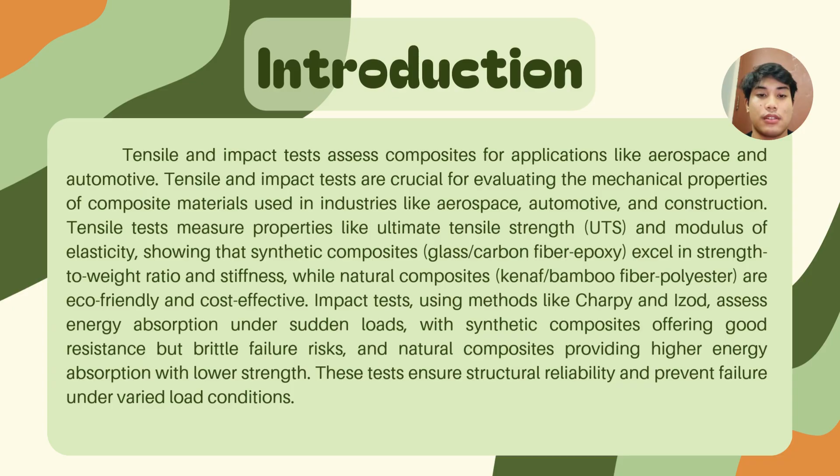For impact tests using methods like Charpy and Izod, which assess energy absorption under sudden loads, synthetic composites offer good resistance but carry a brittle failure risk. Natural composites provide higher energy absorption but with lower strength. These tests ensure structural reliability and help prevent failure under varied load conditions.

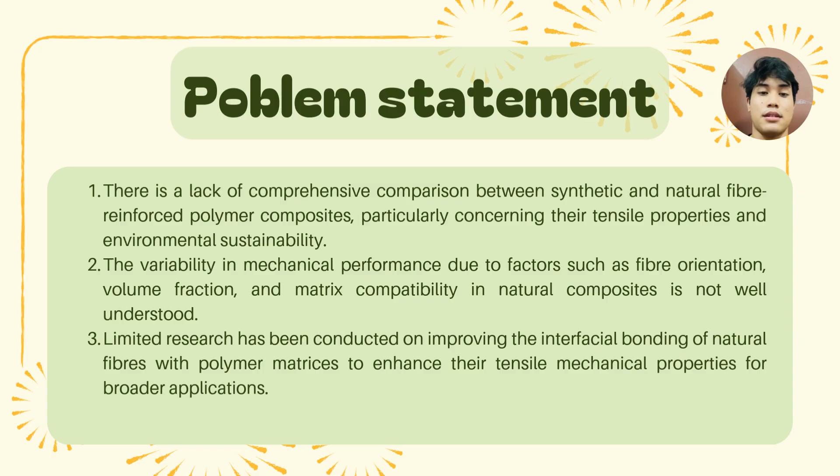For the problem statements: first, there is a lack of comprehensive comparison between synthetic and natural fiber reinforced polymer composites, particularly considering their tensile properties and environmental sustainability. Second, variability in mechanical performance due to factors such as fiber orientation, volume, and matrix compatibility in natural composites is not well understood. Lastly, limited research has been conducted on improving the interfacial bonding of natural fiber with polymer matrices to enhance their tensile mechanical properties for broader future applications.

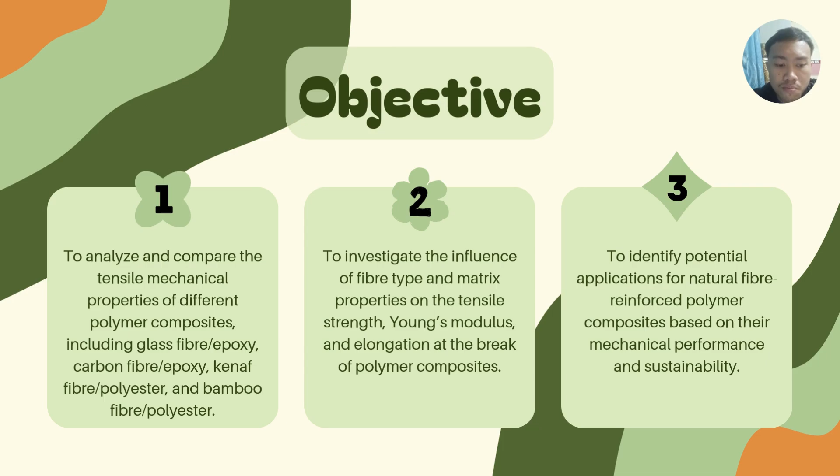For the objectives, we have three in this literature review. First, to analyze and compare the tensile mechanical properties of different polymer composites, including glass fiber epoxy, carbon fiber epoxy, kenaf fiber polyester, and bamboo fiber polyester. Second, to investigate the influence of fiber types and matrix properties on the tensile strength, Young's modulus, and elongation at break of polymer composites. Third, to identify potential applications for natural fiber reinforced polymer composites based on their mechanical performance and sustainability.

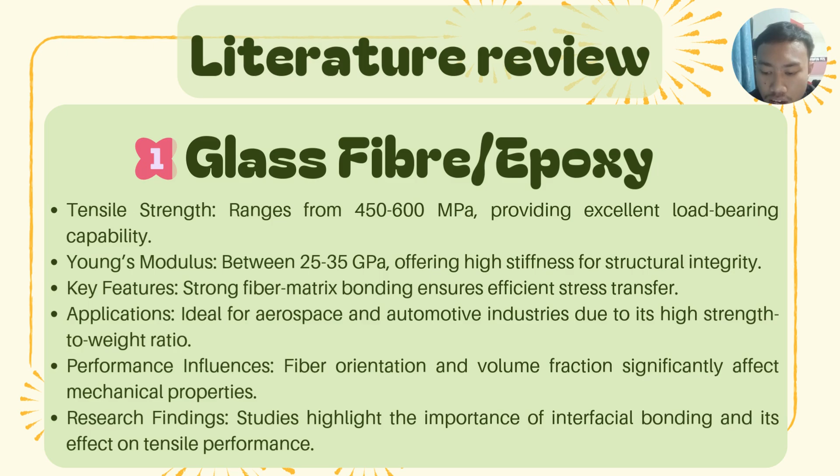Moving on to the literature review: glass fiber epoxy. Its tensile strength ranges from 450 to 600 megapascals, providing excellent load bearing capability, and the Young's modulus ranges between 25 to 35 gigapascals, offering high stiffness for structural integrity. Key features include strong fiber-matrix bonding that ensures efficient stress transfer. Applications are ideal for aerospace and automotive industries, and performance is significantly influenced by fiber orientation and volume fraction.

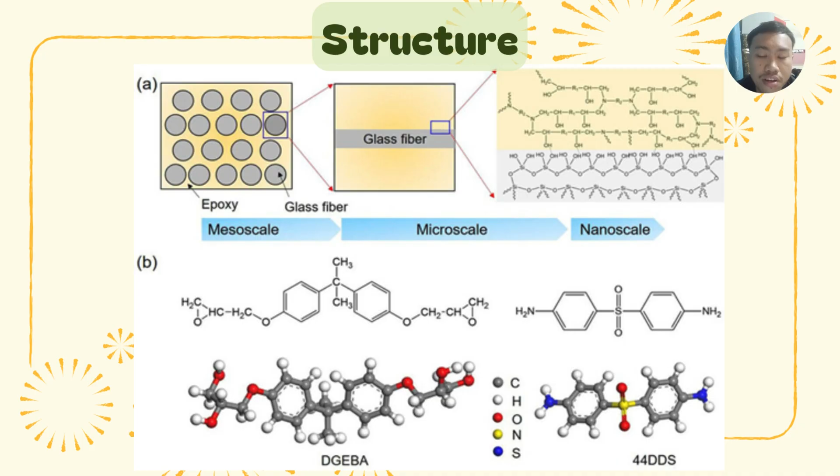Research findings highlight the importance of interfacial bonding and its effects on tensile performance. This is the structure of glass fiber epoxy: we can see epoxy and glass fiber combined together at part A, and at part B we have meso scale, micro scale, and nano scale.

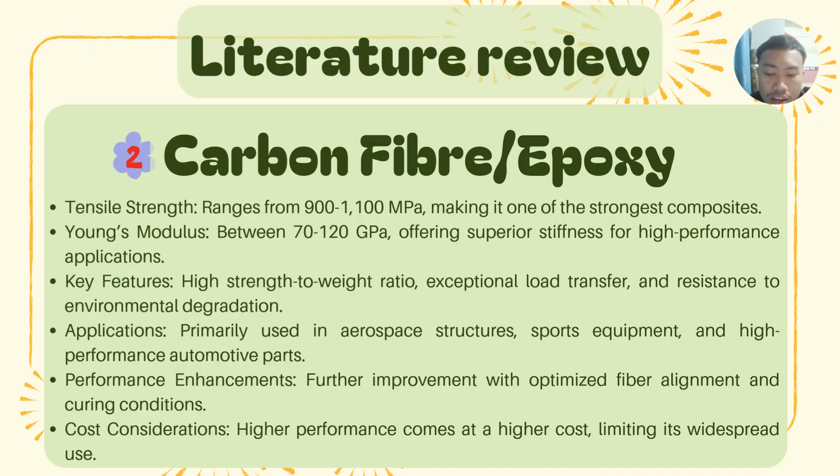It is also used in aerospace structures, sports equipment, and automotive parts. Performance can be further improved with optimized fiber alignment and curing conditions. As for cost consideration, higher performance comes at a higher cost, which limits its widespread use.

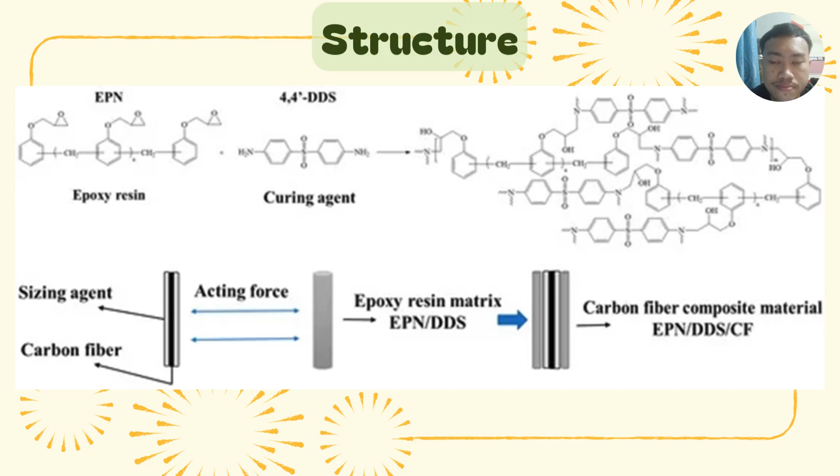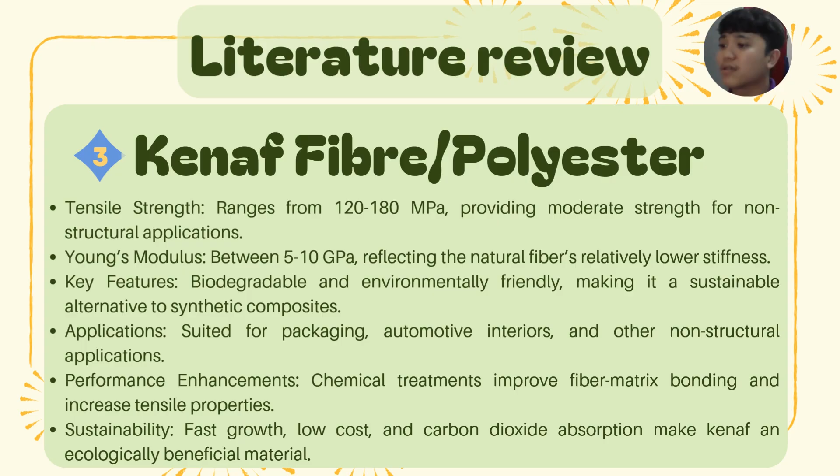As a reference literature review, bamboo fiber polyester: tensile strength ranges from 100 to 150 megapascal, suitable for lightweight applications. Young's modulus between 4 to 8 gigapascal, indicating moderate stiffness.

Key features: high environmental benefits, including fast growth and low pesticide requirements. Applications often used in construction, furniture, and low-cost building materials.

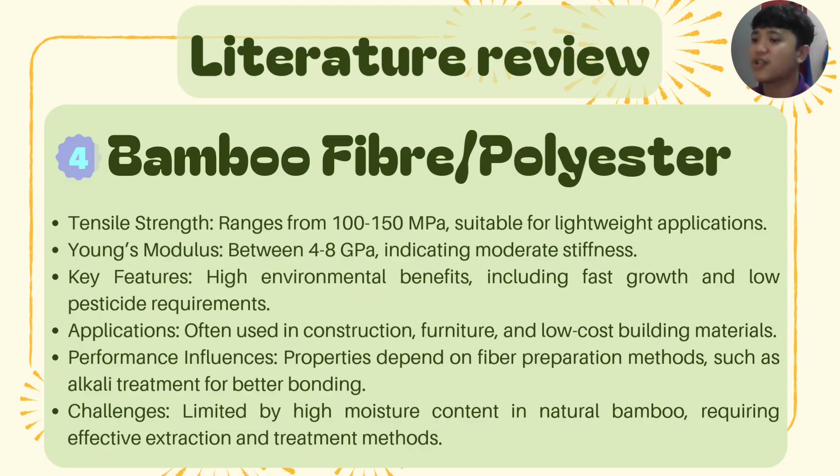Performance influences: properties depend on fiber preparation methods such as alkali treatment for better bonding. Challenges: limited by high moisture content in natural bamboo, requiring effective extraction and treatment methods.

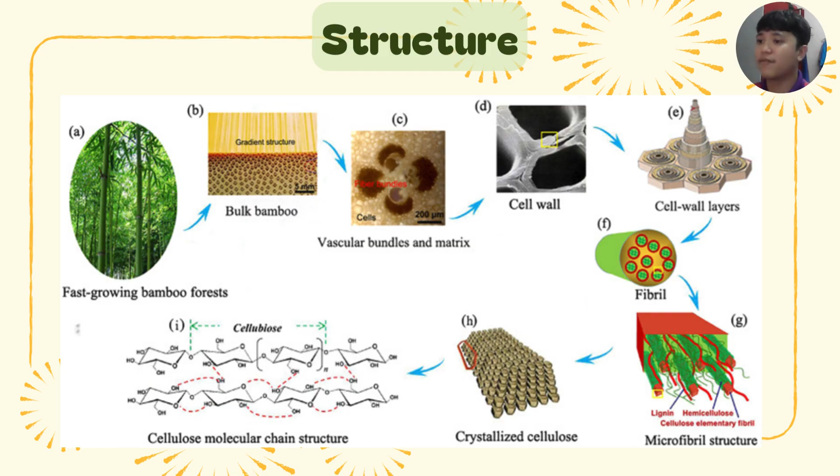As for the structure, it starts from fast-growing bamboo forest into bulk bamboo, then into vascular bundles and matrix, cell wall layers, fibril, microfibril structure, and crystallized cellulose molecular chain structure.

As for the literature review comparative analysis: glass fiber epoxy provides a balance of high tensile strength and stiffness, ideal for structural use in demanding environments. Carbon fiber epoxy offers superior tensile strength and stiffness but is more expensive, suitable for high performance applications only.

Bamboo fiber polyester offers lower tensile strength but is more cost effective and biodegradable, making it ideal for eco-friendly applications. Performance variability: mechanical properties are influenced by fiber orientation, matrix properties, and treatment methods.

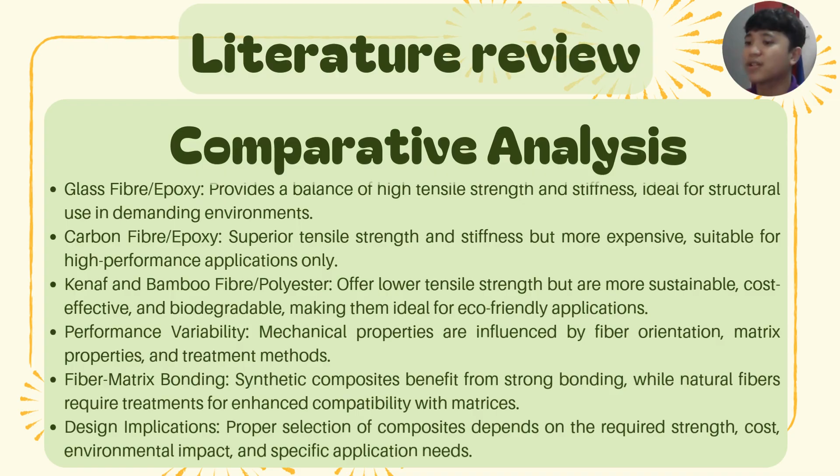Fiber matrix bonding: synthetic composites benefit from strong bonding, while natural fibers require treatments for enhanced compatibility with matrices. Design implications: proper selection of composites depends on the required strength, cost, environmental impact, and specific application needs.

Next, we move to the methodology. In methodology, we focus on fabrication and testing of the composite material.

For preparation of tensile specimens, UPE (unsaturated polyester) and epoxy resin were employed as materials. For the natural fibers, including kenaf and bamboo, surface treatments were adopted to enhance fiber matrix adhesion.

The most widely adopted treatment was alkali treatment, to remove non-cellulosic materials such as lignin and wax. This was not applied to synthetic fibers, because synthetic fibers such as glass and carbon have natural good adhesion with the polymer matrix.

For the fabrication technique, filler of 48 micrometer particle size was used, providing higher elastic modulus, wear resistance and thermal stability. For preparation, filler was dried at 65 Celsius for 1 hour, and epoxy was preheated at 65 Celsius to reduce viscosity.

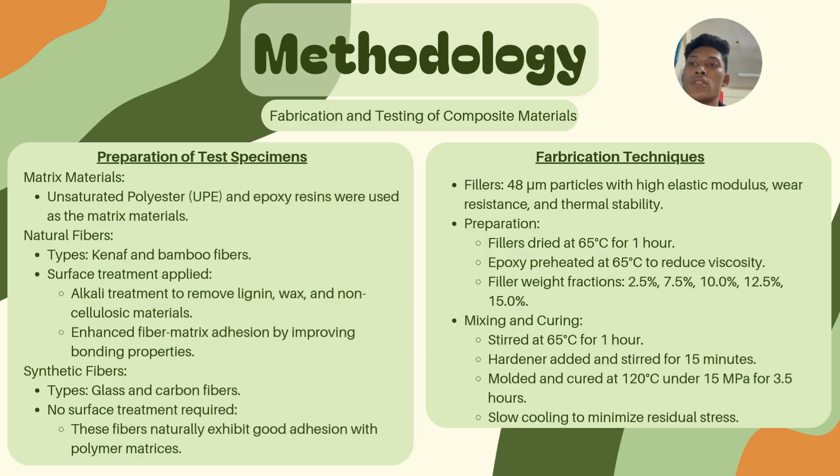Next, mixing and curing: stir at 65 Celsius for 1 hour, then add hardener and stir for 15 minutes. Mold and cure at 120 Celsius under 15 megapascal for 3.5 hours, followed by slow cooling to minimize residual stress.

Next, for the tensile test: specimens were cut into rectangular blanks using a diamond blade saw, and edges were finished with emery paper to avoid surface flaws.

The tensile test applies a uniaxial load to the specimen and measures the response of the material as it is stretched until failure. The purpose of this test is to determine the monotonic mechanical properties of the composite material.

Among the monotonic mechanical properties obtained from the tensile test are yield strength, ultimate tensile stress, and Young's modulus. Ultimate tensile stress is measured to determine the maximum stress the material can withstand when stretched or pulled before necking occurs, which is localized reduction in the cross-sectional area.

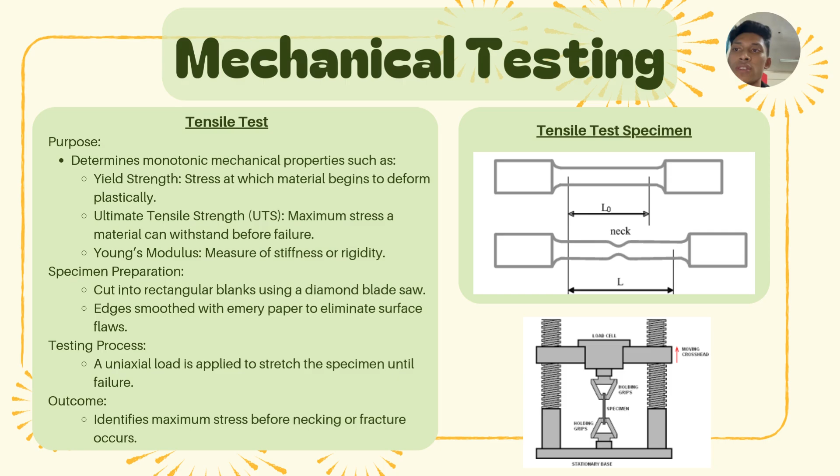For the impact test, this is a type of dynamic test that applies a sudden load to a specimen and measures the amount of energy absorbed by the material before it breaks. The most common types of impact tests are Charpy and Izod, which use a pendulum hammer to strike the specimen at a specific location and angle.

The impact test is useful for evaluating the toughness, ductility, and brittleness of a material, especially at lower temperatures with high strain rates. The purpose of the impact test is to evaluate material toughness, which refers to the amount of energy a material can absorb before fracturing. Impact strength is measured by recording the energy absorbed by the specimen during impact, typically expressed in joules. The results provide insight into the material's fracture behavior, including resistance to brittle failure and its ability to deform under stress.

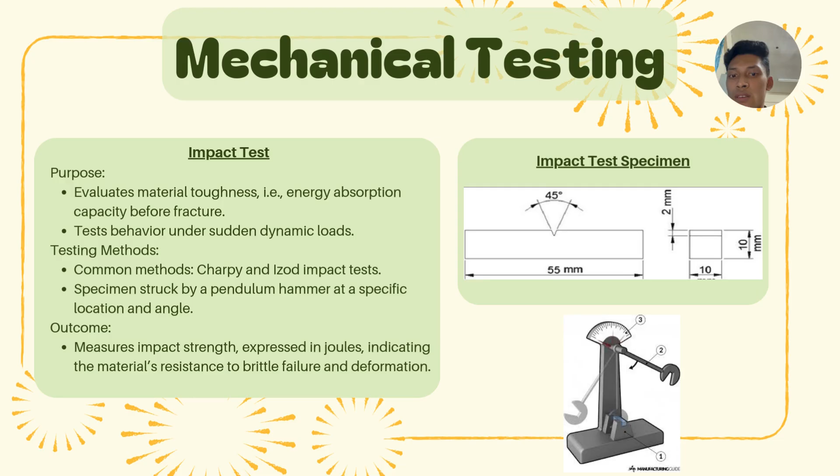Now moving to the comparison between tensile test and impact test: what is measured? For tensile test, material strength under a steady load. For impact test, material ability to absorb energy during a sudden force. For load type, tensile test uses gradual and steady loading, while impact test involves sudden, high-speed loading.

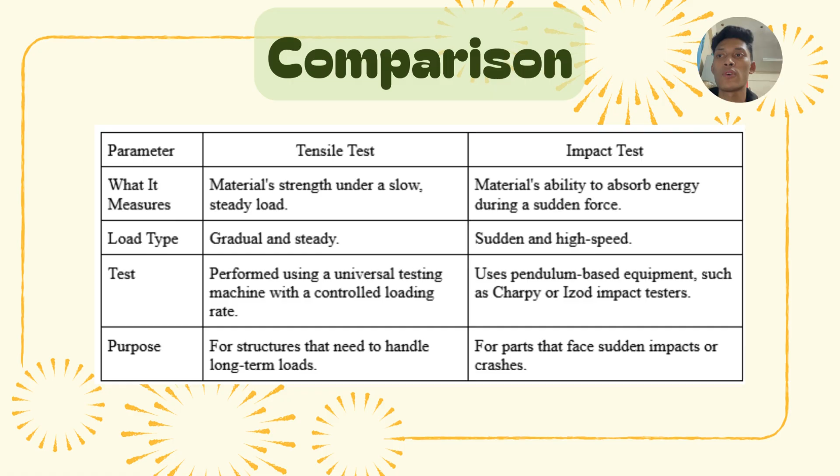The tensile test is performed using a universal testing machine with a controlled loading rate. The impact test uses pendulum-based equipment such as Charpy and Izod impact testers. Tensile tests are used for structures that need to handle long-term loads, while impact tests are used for parts that face sudden impacts or crashes. Next, we move to results and discussion.

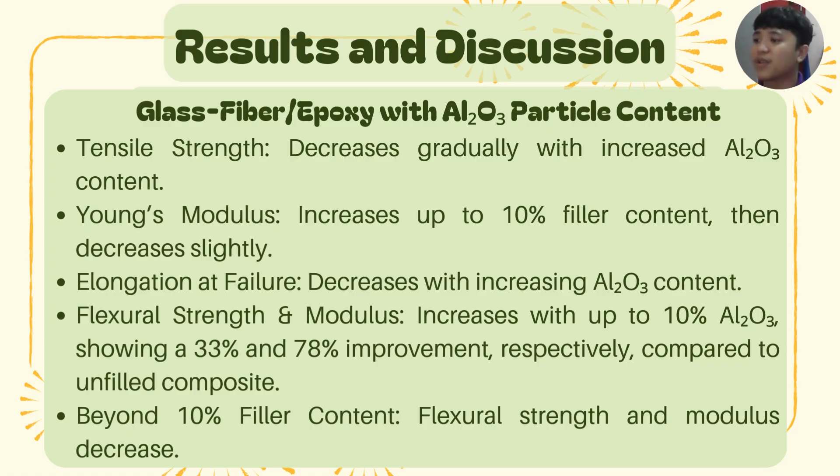For glass fiber epoxy with aluminum oxide particle content: tensile strength decreases gradually with increased aluminum oxide content. Young's modulus increases up to 10% filler content, then decreases slightly. Elongation at failure decreases with increasing aluminum oxide content. Flexural strength and modulus increase up to 10% aluminum oxide, showing 33% and 78% improvement respectively compared to the unfilled composite. Beyond 10% filler content, flexural strength and modulus decrease.

Moving on to bamboo fiber polyester: tensile strength and modulus decrease with higher fiber loading in BFRNR. The optimal fiber content is 30% by mass for the best balance of tensile strength and modulus. For tensile strength increase, BFGC composites show a continuous increase in tensile strength with fiber content from 10% to 50%.

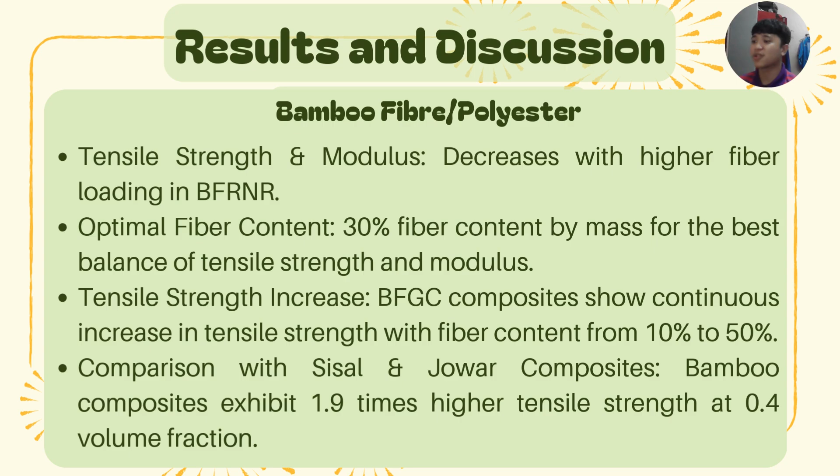Comparison with sisal and Jowar composites: bamboo composites exhibit 1.9 times higher tensile strength at 0.4 volume fraction. For carbon fiber composites, tensile strength material 1 shows 898.3 megapascal, material 2 shows 739.8 megapascal.

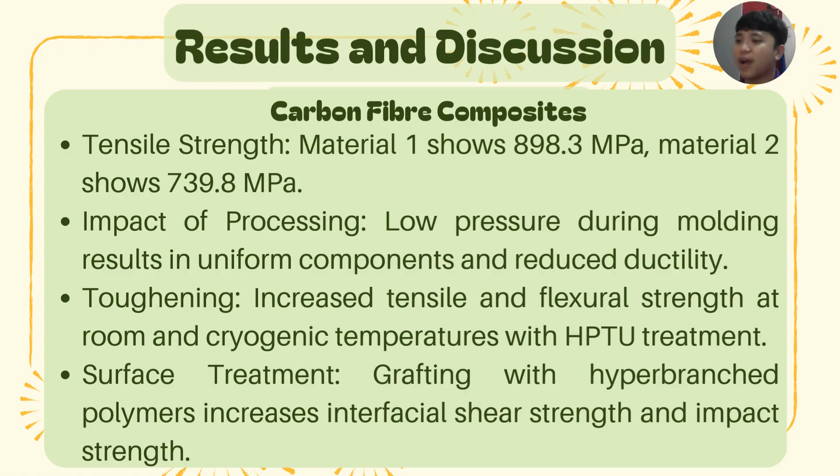Regarding processing impact: low pressure during molding results in uniform components but reduced ductility. Toughening increased tensile and flexural strength at room and cryogenic temperatures with HPTU treatment. Surface treatment, specifically grafting with hyperbranched polymers, increases interfacial shear strength and impact strength.

For kenaf fiber composites: tensile strength is highest at 30 wt% with 20 mesh filler. At 40 mesh filler with 40 wt%, tensile strength increases to 15.5 megapascal due to better filler-matrix bonding. Young's modulus increases with higher fiber loading, supporting larger loads. For polymer additives, MAPP and CNTs improve strength, but CNT agglomeration can reduce effectiveness.

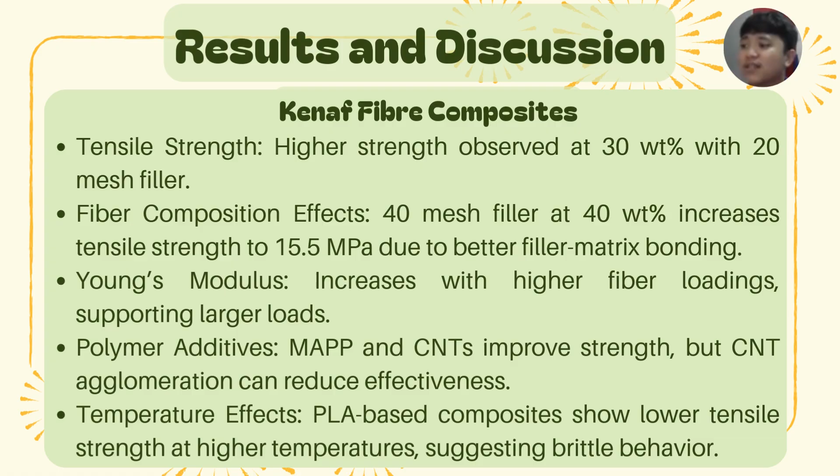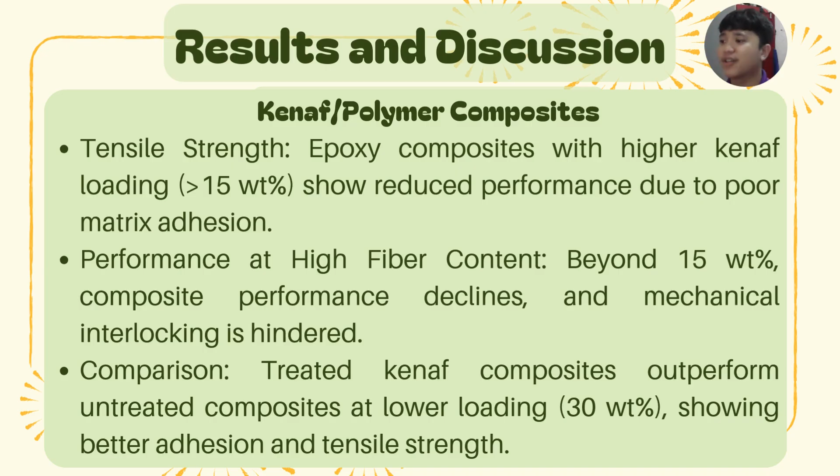Regarding temperature effects, PLA-based composites show lower tensile strength at higher temperatures, suggesting brittle behavior. Finally, for kenaf polymer composites: tensile strength of epoxy composites with higher kenaf loading above 15 wt% shows reduced performance due to poor matrix adhesion. Beyond 15 wt%, composite performance declines and mechanical interlocking is hindered. In comparison, treated kenaf composites outperform untreated composites at lower loading of 30 wt%, showing better adhesion and tensile strength.

In conclusion, tensile and impact tests are crucial for understanding the mechanical behavior of composite materials under various loading conditions, aiding in material selection and design.

Tensile tests measure properties like tensile strength, Young's modulus, and ductility under steady, uniaxial loading, highlighting the high strength and rigidity of synthetic composites such as carbon fiber for demanding applications, while natural fiber composites like kenaf and bamboo offer eco-friendly, cost-effective alternatives with moderate strength.

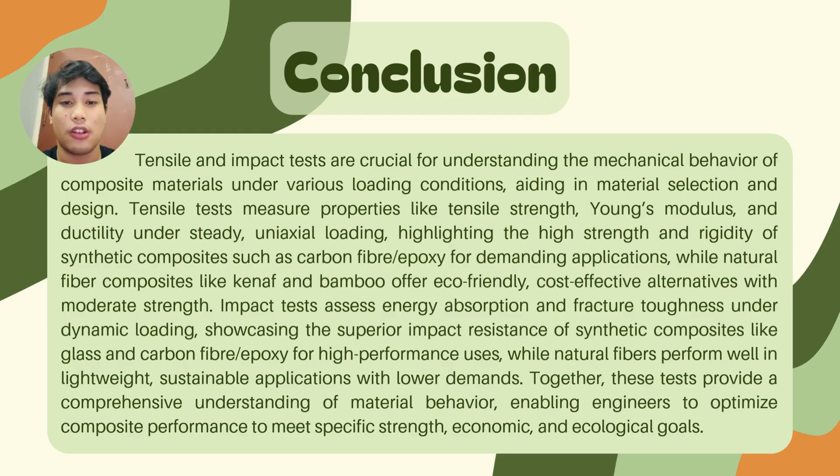The impact test assesses energy absorption and fracture toughness under dynamic loading, showcasing the superior impact resistance of synthetic composites like glass and carbon fiber for high-performance uses, while natural fiber composites perform well in lightweight, sustainable applications with lower demands. Together, these tests provide a comprehensive understanding of material behavior, enabling engineers to optimize composite performance to meet specific strength, economic, and ecological goals. So that's all. Thank you.